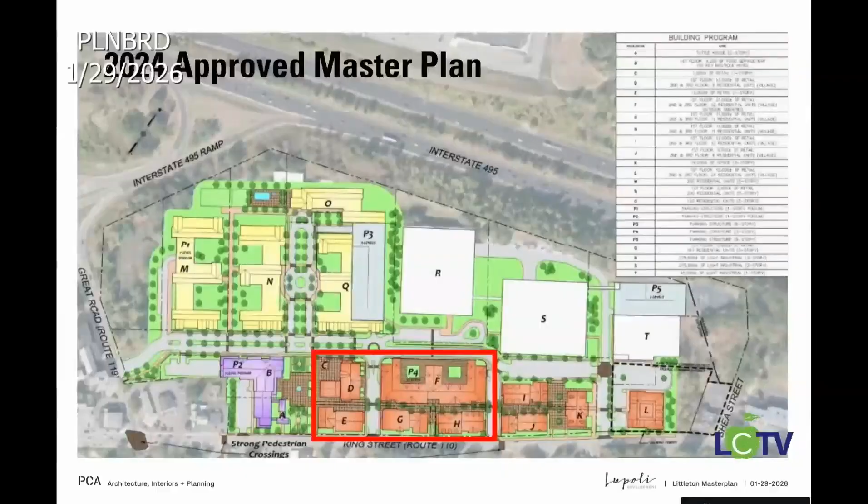Before we jump into the more fun stuff, over the last month or so we've heard from the community that there was a perception that what we were proposing was vastly different from what was approved. I mentioned this last meeting and won't dwell on it too much, but it's important for everyone to see this is what was approved by the board and the community.

This went through a rigorous process for master plan approval, most recently in June of 2024. The outline here shows what this phase is, and the buildings along King Street, so much of it is nearly identical. I just wanted to level set with all the folks that might not be as intimately involved as the board members and our team.

Reiterating that there was a desire by our team, and I think others, to have parking along King Street. Some folks may have heard this last time, but I want to reiterate that MassDOT owns and controls King Street and Great Road. They specifically asked us to remove the parking on King Street as part of the MEPA process approved last year, and we complied. These are just the facts, people should be aware of them. It's not something we did unilaterally.

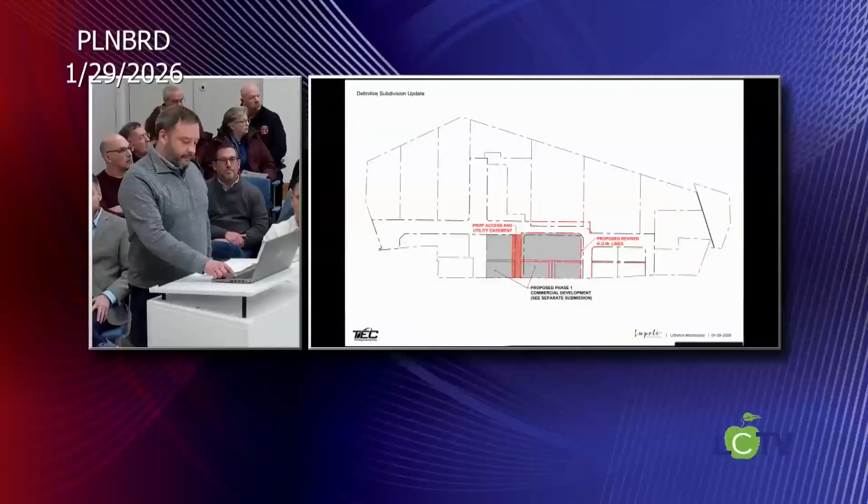Lastly, just to tee up the group before Chris joins and speaks to the traffic and stormwater. Last time I spoke, the message was that we were searching for a balance between the viability of the retail -- and we're going to hear from our retail expert tonight, Jeremy Grossman -- and the feedback we've heard from this board and the community about form-based code and activating King Street. I'm happy to say that I believe tonight we'll show you that we've found that balance.

My hope and the takeaway from the community and the board tonight is that the message now is that we've listened, and we hope that comes through in our presentation.

With that, I'll give it to Chris Raymond. Thank you, Morgan. Thank you, Mr. Chair and members of the board, for having me here this evening. Great to see you all again. My name is Chris Raymond from TEC.

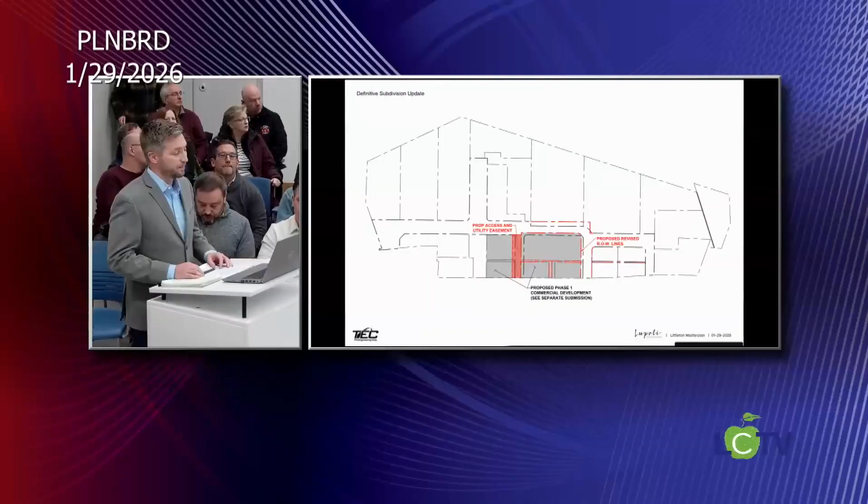Before we jump into the exciting site plan review updates we have for you tonight, I wanted to reiterate this plan. In addition to site plan approval, we're also seeking approval for minor modifications to the subdivision plans to help facilitate the phase 1 development and surrounding infrastructure. As shown on the graphic, highlighted in gray is the extent of the phase 1 development being proposed. The existing property lines are shown in black, and highlighted in red are the proposed modifications.

Could you please speak up? We can't hear you very well. Sorry.

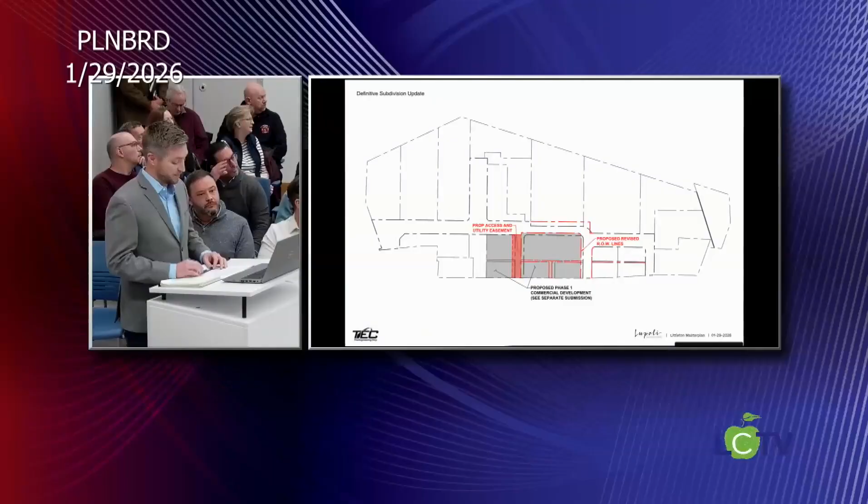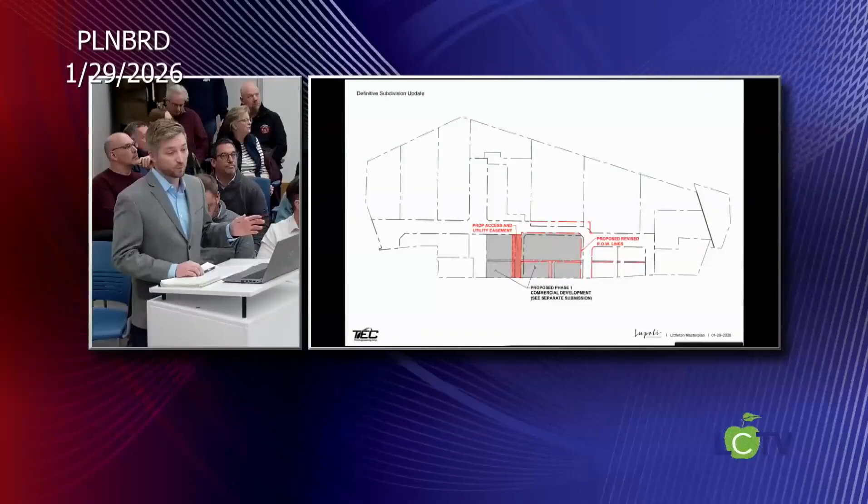Highlighted here in gray is the extent of the phase 1 commercial development we're proposing. Shown in black are the existing property lines, and highlighted in red are what we're seeking to amend with some minor modifications. This is simply a process we need to go through to move these property lines, specifically going through this definitive subdivision process so we can modify the right-of-way lines.

I know we moved the podium, but the microphone's up in the ceiling over there. Can we move the podium that way? I'm not sure how you want to handle that. I think the community still needs to hear -- it's very small, do it. That's great, thank you. Sorry, Chris. It's okay.

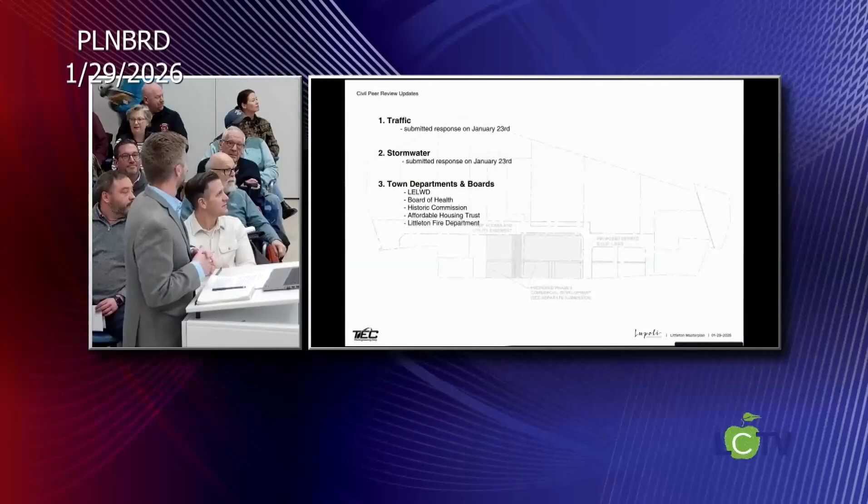All right, so that's the definitive subdivision update. I want to change the lighting so people can see better.

Flipping back on the right-of-ways for just a second -- the timing on the right-of-way changes, is that a separate process, or do they need to be done at the same time as any building sizes being finalized? Yeah, it's a separate process. Nothing in this process changes anything we're proposing as part of the development. It's simply the mechanism to adjust the property lines.

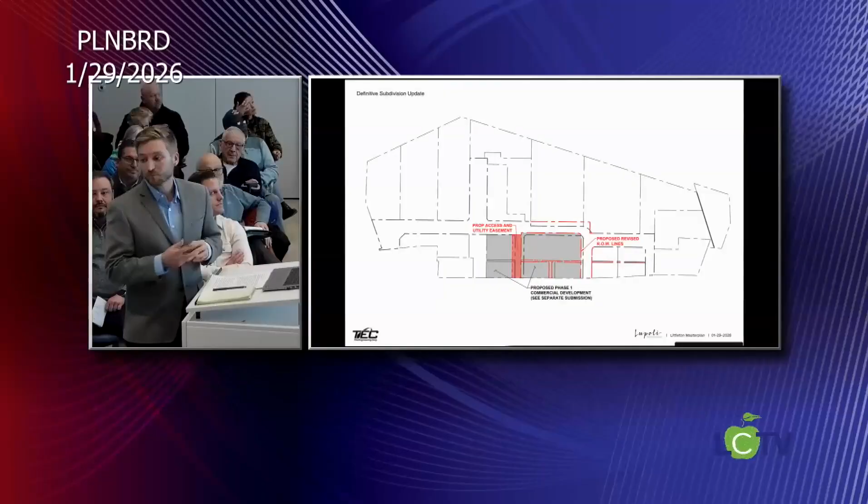But what's not overlaid there is -- if you adjust the size of the buildings, will they encroach on any of those right-of-ways? That's what you can't tell from this, where we're at in the process. Our current proposal doesn't encroach. We're going to try to color in the lines that we're currently proposing.

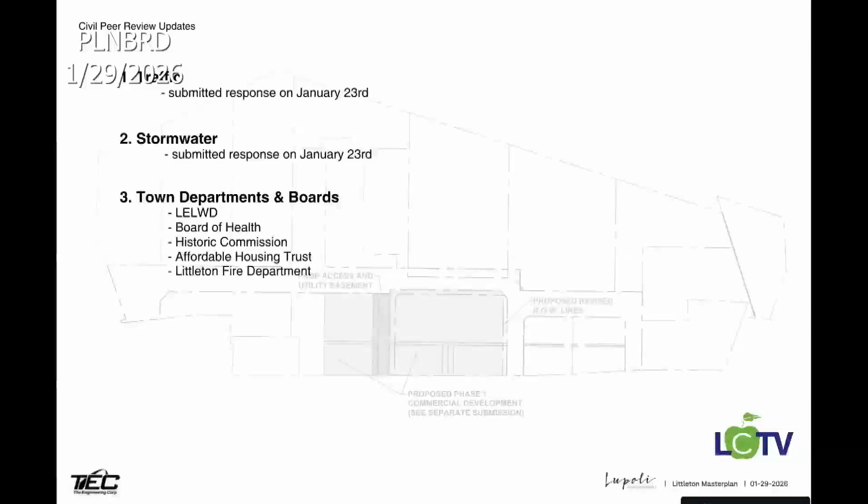I want to give an update on various peer reviews since the last meeting. We were able to get peer reviews from Green International, who peer reviewed both the traffic and stormwater for the site. We've had the opportunity to meet with a couple members of Green, who are here with us tonight, which we appreciate. We've met with them, reviewed their comments, resolved them, and issued a formal response as of last week. I'm sure they're reviewing that now.

In addition to the peer review comments from Green, we've also received great feedback from various town departments and boards, including LELWD, the Board of Health, the Historic Commission, Affordable Housing Trust, and Littleton Fire Department. We have a meeting set up with LELWD and Littleton Fire Department for next week to review their comments.

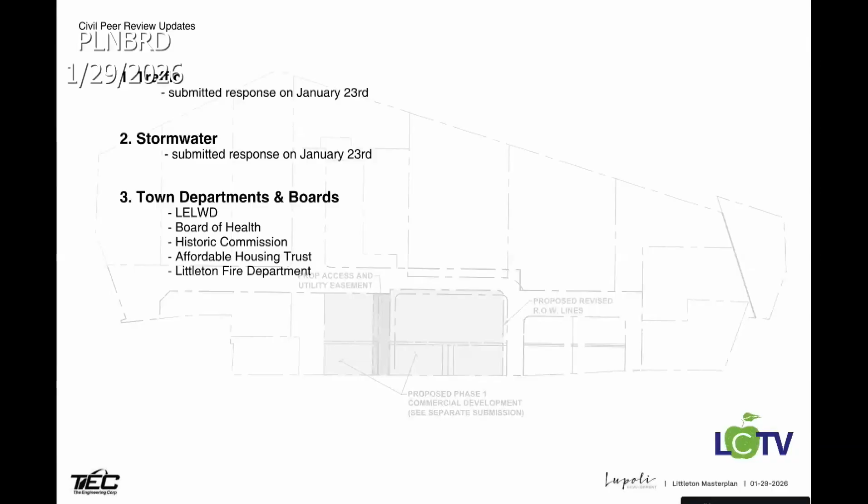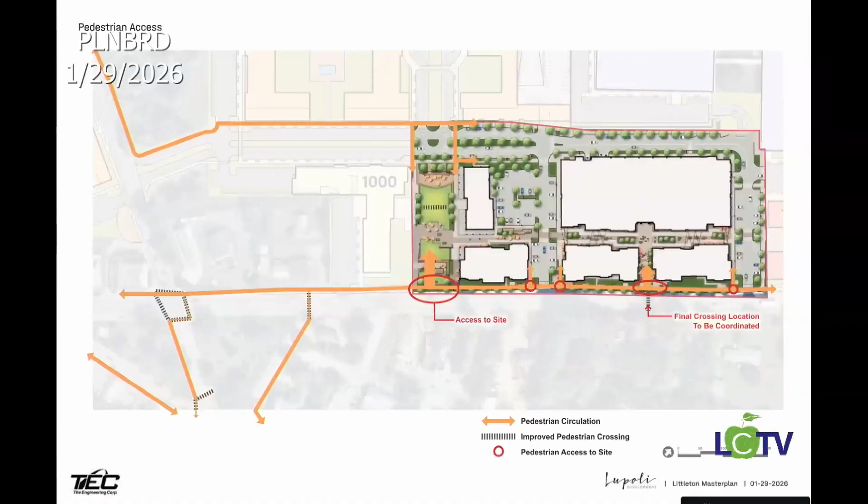We just want to zoom in on this a little bit. Again, you can't really see the aerial, but we wanted to highlight some of the access points, shown by the red circles here. We know it's important to have access from King Street, so you can see multiple pedestrian access points along King Street to bring people into the site. This is really highlighted by the conceptual plan for the town green on the left side here. We know that will be an important pedestrian access to funnel people into the site, especially from downtown and the town green. We want this to be a gateway into the site for people coming and going, to really connect the downtown and the proposed development here.

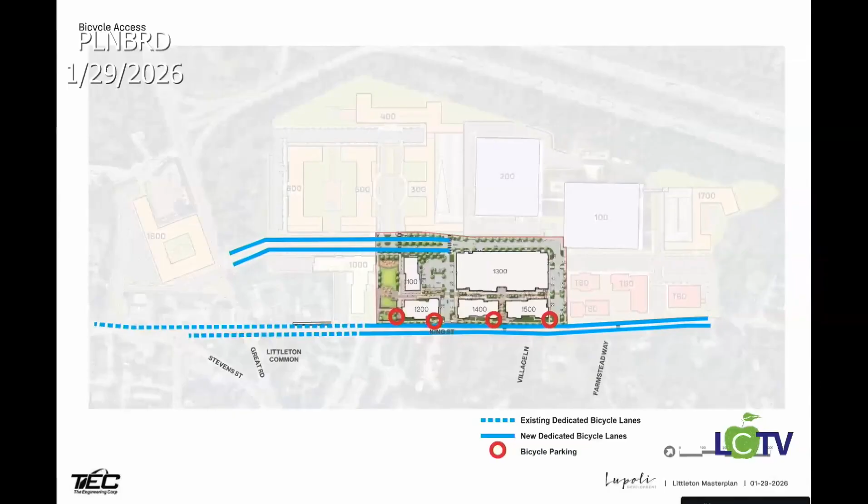And then at the King Street and Great Road intersection, there'll be pedestrian improvements there, as well as traffic signal retrofit upgrades, and there'll be some timing coordination done with the various lights along Great Road to make sure timings are optimized there as well.

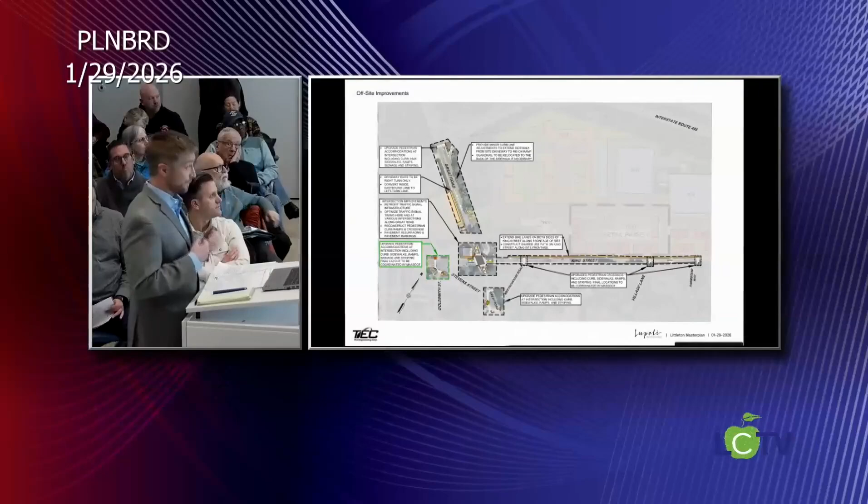And it was really highly focused on the intersection at Goldsmith, Stevens, and King Street, which had the unfortunate fatality. We saw just how important it is to make some upgrades there to make people feel safe when they're traveling in their downtown. It's important for us to make sure that pedestrians coming to and from our site also feel safe. So we are committed to working with DOT to make the necessary improvements at this location to make everyone feel safe.

So just on that new chunk of sidewalk that's gonna go down Great Road there, is that gonna be right at the curb, or is there gonna be a 24, 36-inch berm space between the highway and the sidewalk? Because some of the sidewalks are right against the road, and they're very uncomfortable because that's going to be a speed-up zone for people going onto the highway.

Conceptually, there's going to be a sidewalk there. We have not done the design plans for that, but we will be adjusting the curb line and increasing the sidewalk there. I know there's a guardrail there, so we'll have to work with Mass DOT on where they want it. I just think it's something to take into consideration, whether you can provide that buffer space, or berm space, whatever the formal term is.

So can we pause on this slide and subject for a minute to allow the board to make comments? Carol, you have a comment. Anna, do you have any comments on this scope of work?

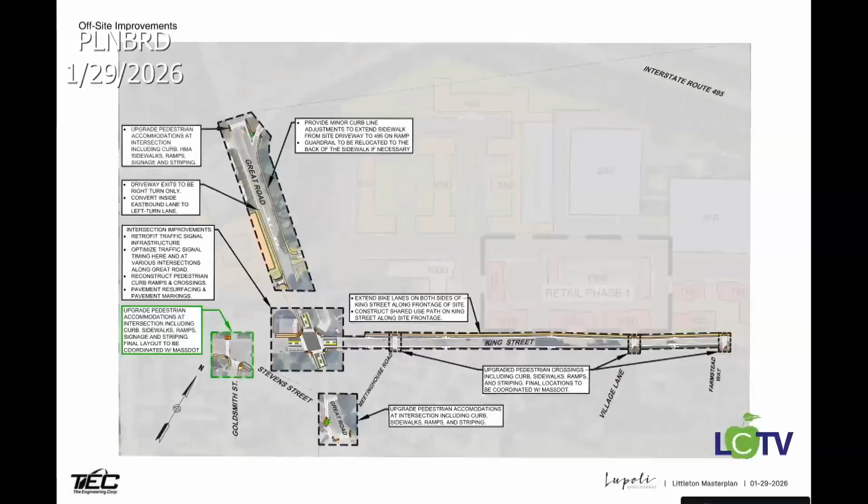Truthfully, that wasn't our first spot to present that. We would prefer a mid-block crossing, but when you do look at the safety concerns we have with incorporating that at our Great Road driveway, it becomes a safety concern, and Mass DOT pointed us towards incorporating this crossing here.

So is there going to be a crossing right there at King Street and Great Road? Right at the intersection? Yep, there'll be all new upgrades there.

So I think I would recommend signage that actually directs pedestrians to go to that corner as opposed to trying to cross a highway. Oh, for sure, yeah, that's a great idea.

Bartlett? Mark? I'm good. My comments would be a couple, a few things we want to accomplish with this aspect of the project.

One of them would be to include a town presence along with you and Mass DOT. You have interests, Mass DOT has interests, the town has interests, and this will be part of the decision. We'd like to set up not a member, but a town presence on this process that would consist of the administrator, a selectman, and a planning board designee.

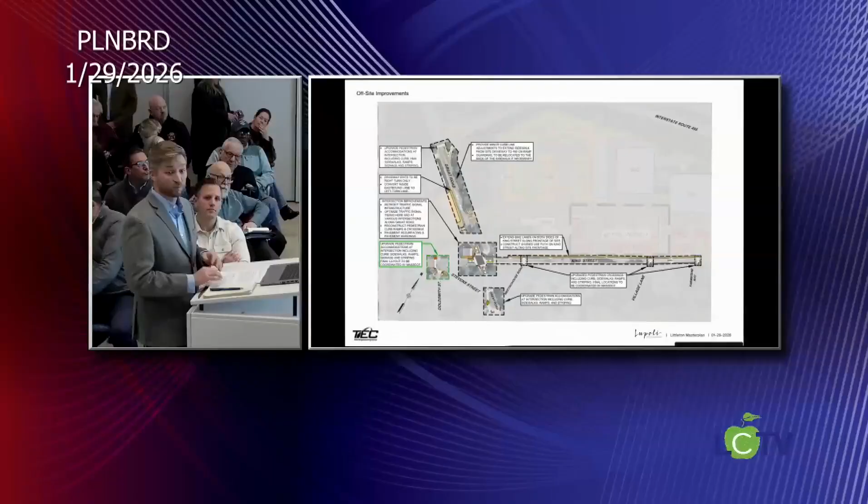I do know at the BPAC meeting, that advisory committee is working towards maybe producing a letter of sorts to send to DOT, some sort of communication with their thoughts and ideas, and that is absolutely something we encourage. If you guys want to directly send some of your comments and ideas to them, we're happy to be involved.

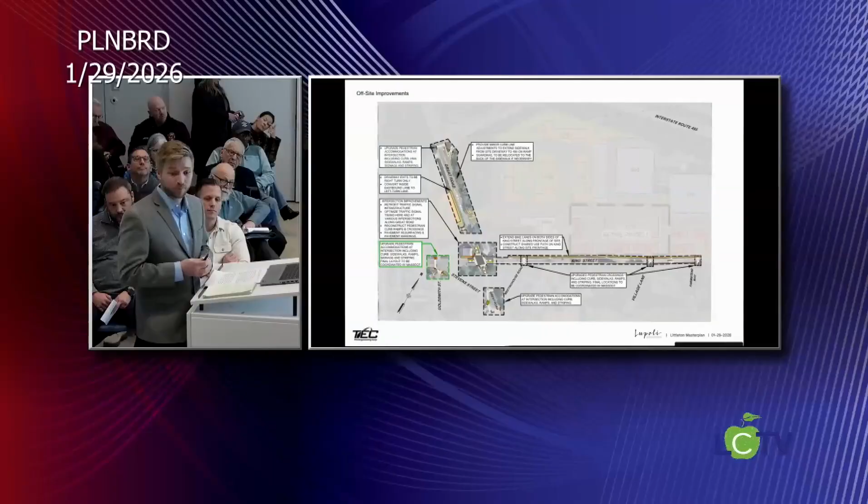Well, I'm speaking for myself. We can talk among the board when we get to that point, but we would be very interested. Jim Dugan, the town administrator, has been in this loop and has some idea about what it would take to accomplish that, essentially override DOT, and it's a town commitment to basically take control of those sections of the roadway, and would also include Great Road.

However, we have an interest as we go forward for this entire area to have a little more control over it. We would have more control over speed limits, we'd have more control over street parking, which would impact further development on Great Road. So anyway, I think we'd like to make that a priority in this process of the traffic mitigation.

Ready to hand it off? I guess what I'd suggest, since we don't control that process, is that we probably would write a letter to the Board of Selectmen requesting them to pursue that. But we can't hold them to an uncommitted timeline.

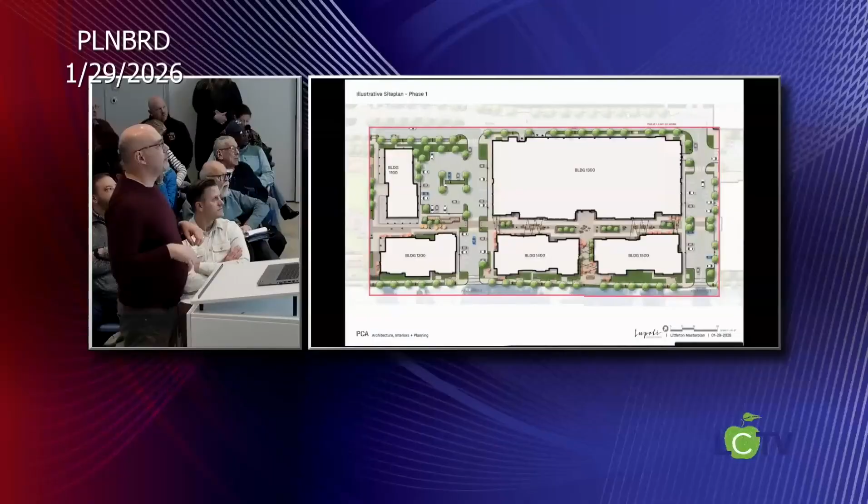So first we're going to start off with an overall reiteration, becoming familiar again with the main parts of the pedestrian realm of the project. So we have our main spine working through the center there as one area, and then we have our green, which would be just off to the left of the screen there. We have, of course, King Street, the King Street edge, and then between building 1400 and 1500, we have our little Vest Pocket Park.

So tonight we're going to focus on King Street and the changes we made. If you look up at the top image and quickly look down, look up, look down, focus on King Street, hopefully what'll start to bleed through is what we've been working on, based on the comments we've heard from the board and, of course, the community.

So if we look at the lower image, or actually, let's stay on the upper image first. What we had presented before essentially was at the back of the roadway curb, we had our treeway, and then on the inside of the treeway, we had our 5-foot sidewalk, and then we had either stone walls to help make up grade, or planting and those sorts of things.

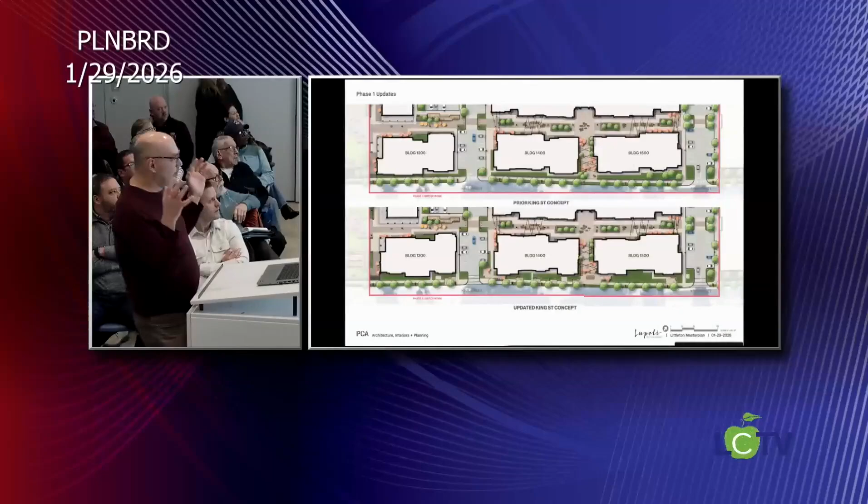So now if we look at the bottom plan, starting over on the left-hand side, just to the left of 1200 is where our green is going to be. So that's the first kind of moment along King Street. We do have some images that quickly show some high-level ideas to tie this all together. And then as you walk east on King Street—

Coming down towards the corner of 1200 is where we hit our first little node. And what we're trying to do essentially along the length of King Street is not focus on one point. We're trying to create moments where we can through the length.

Some of them are bigger, like the green, and some are smaller, like little micro nodes of benches, and others are intermediate, where we were able to wrap the building and introduce entrances, at the left lower corner of 1400 and the left lower corner of 1500, where we have nice little cafe zones.

And then, of course, we have our little Vest Pocket Park between 1400 and 1500, which is a nice bookend for what the green is going to be offering along King Street.

So again, if we walk down, we get to that corner of 1200, and you can see that's our first little node that we're creating. And that parking space—we took 2 parking spaces off out of the parking count there, which was a tough pill to swallow, but we thought it was worthwhile to create a little node along King Street. We do have some imagery that'll help clarify what that'll start to look like.

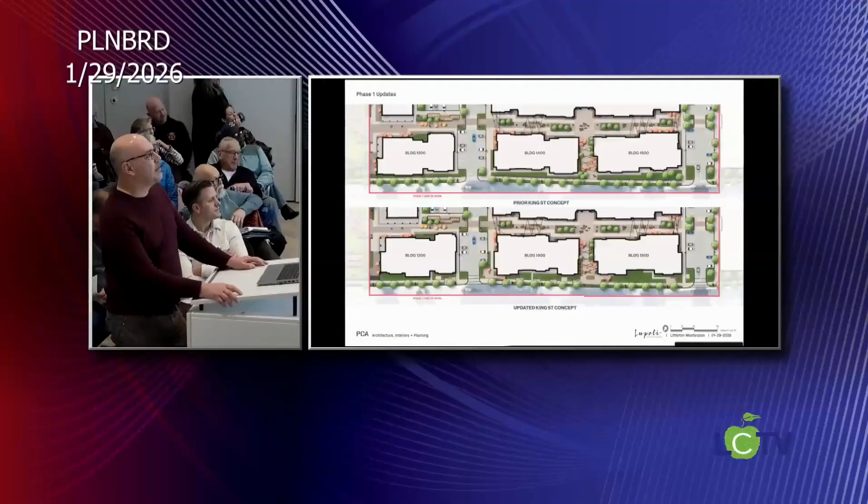And then just to the east of that, we have another little entrance that we were able to get in there. It's at 1400, and we introduced another little cafe zone there. And then moving down towards the right side of 1500 along King Street, we have another little nook with some more seating. Again, what we've tried to do was spread it out where it made sense, where we could in terms of grading.

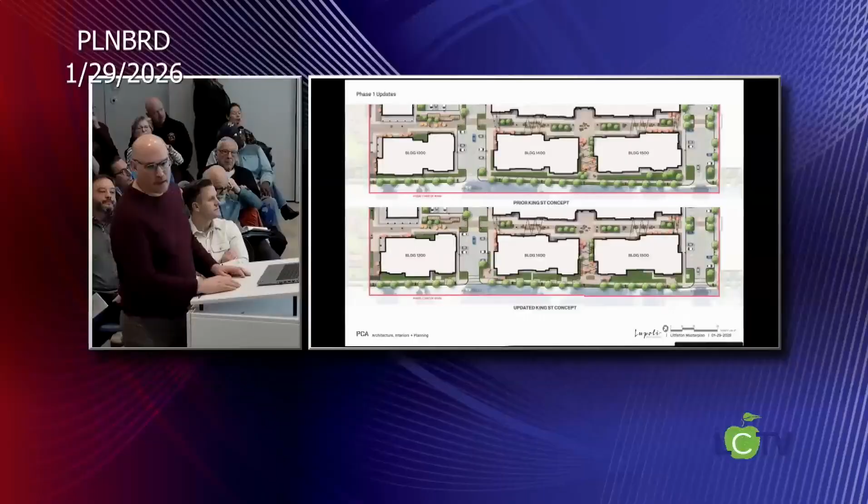So that way there, if you were getting a coffee, you didn't really have to go too far to find a place to sit, depending on what scale and what type of intimacy you wanted to hang out in. And so from here, we'll relate it a little bit to the form-based code that was developed.

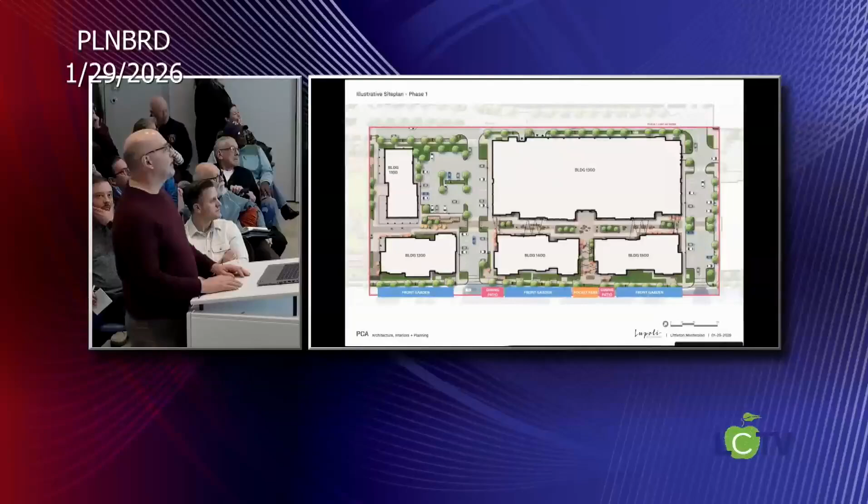We've got the front garden and the dining patio, and then, of course, our little pocket park, which was not in the form-based code, but I think it's worth mentioning because it's a little different space. It is a nice public programmable space that's going to be along that back of sidewalk of King Street.

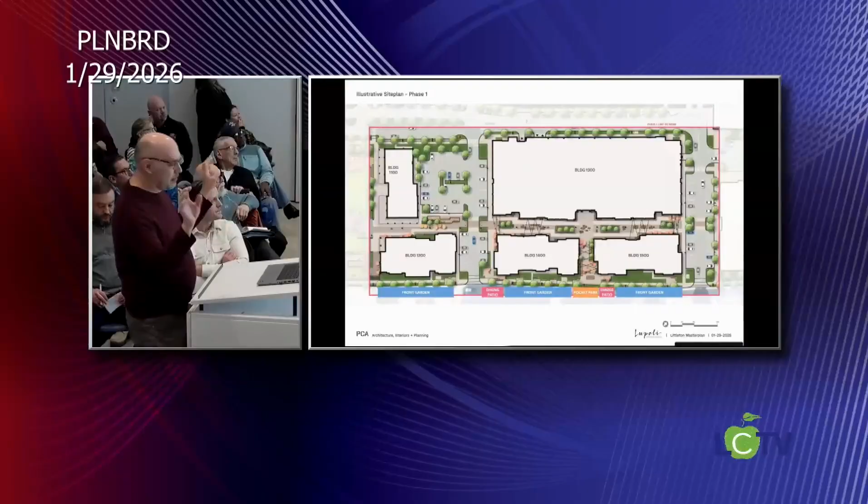And you can see it's sort of stretched along through the whole length there. And then we're going to go through a couple of images, kind of relating it back to the form-based code. And then after this, we'll have a quick walkthrough down King Street so we get a sense of what it's going to look like.

So here we're looking at the front garden and requirements there: 80% planted area, minimum 4-foot wide walkway. We have our nice little garden planting, could be perennials, little woody plants, annuals, and then a hint of what that mini little seat nook will start to look like, and our initial ideas of the type of seating we want out there. Those seats aren't going to be short. We envision them being 2 benches put together, could be up to 14 feet of length of sitting area.

And then we're looking at the dining patio. This one in particular is at the corner of 1500. And again, I think the code called for a minimum of 6-foot width for movable tables and chairs. We're achieving that here, plus a minimum of a 4-foot walk to get in that door and get by there.

These will be movable, so you'll be able to make your own space depending on how many people are in your group, or if you want to just sit on your own and scroll through Instagram, you're able to do that here.

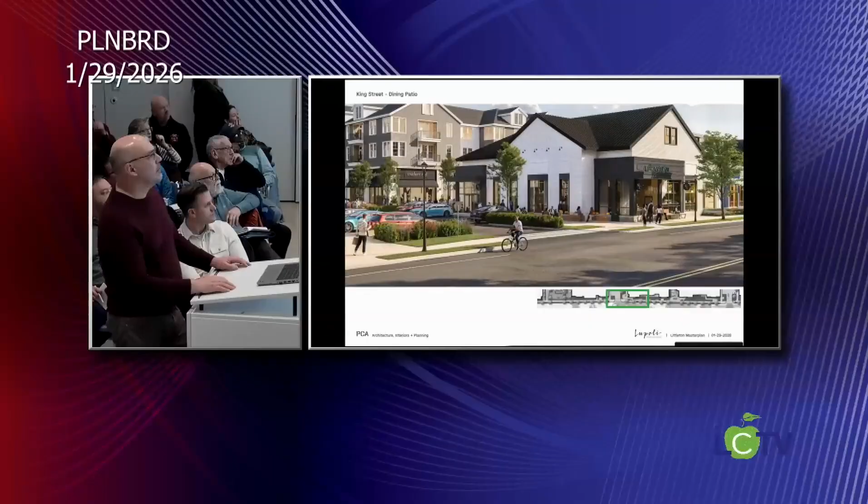Continuing on down, this is showing pretty much that stretch in front of 1400 and our little mini seat nodes that we have in there, and what those will start to look like. They'll have some weight against the base of the building, so everything feels integrated and feels like a complete streetscape along that edge.

And then finally, coming down here to our little pocket park and cafe zone at the corner of 1500, you can start to peek into that pocket park and what that back side is going to look like, and how those fixed benches can really start to animate that edge and help make an inviting entrance into the project here.

I think that's it for me for the public realm. Move off to Jim. Jeremy.

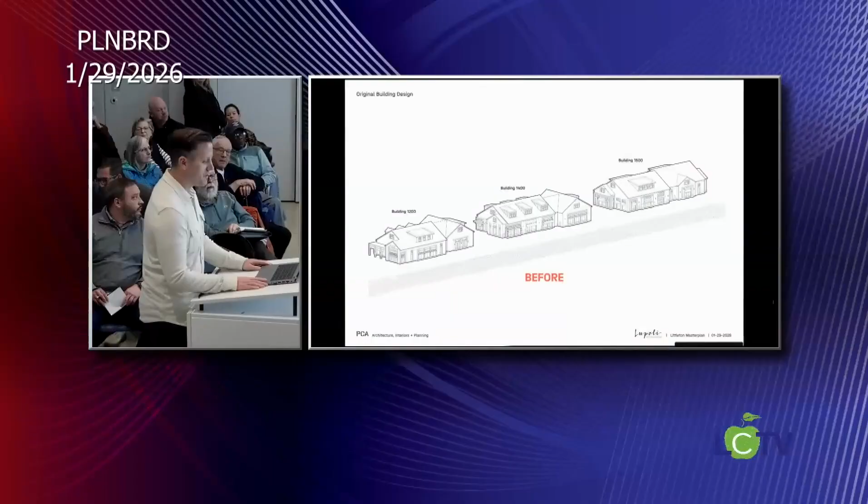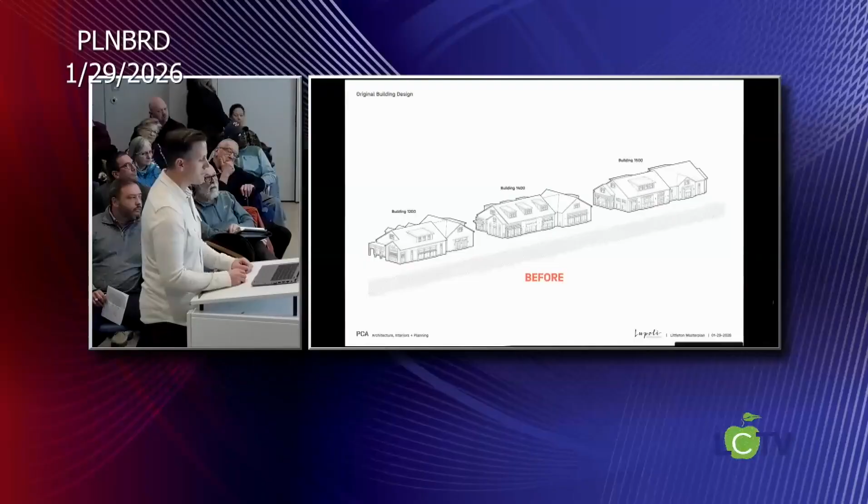We're almost done. Dave Snell from PCA, Master Plan Architects here. I'm going to continue this and talk about a lot of the changes we made on the buildings along King Street. We've heard a lot from the community, we've had a chance to meet with UTL, we've talked through the peer review with Jesse and gone through a lot of different thinking. I hope it comes across—we've worked really hard to manipulate these buildings where they hit King Street to accomplish many of the goals set out in the form-based code.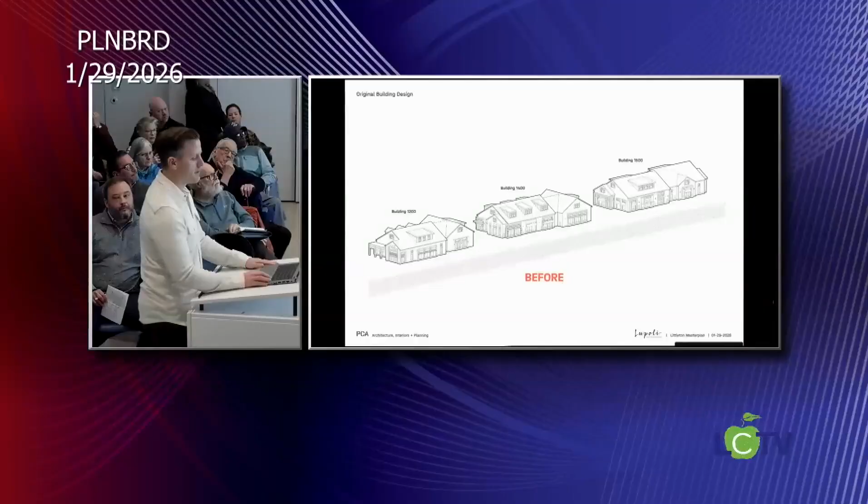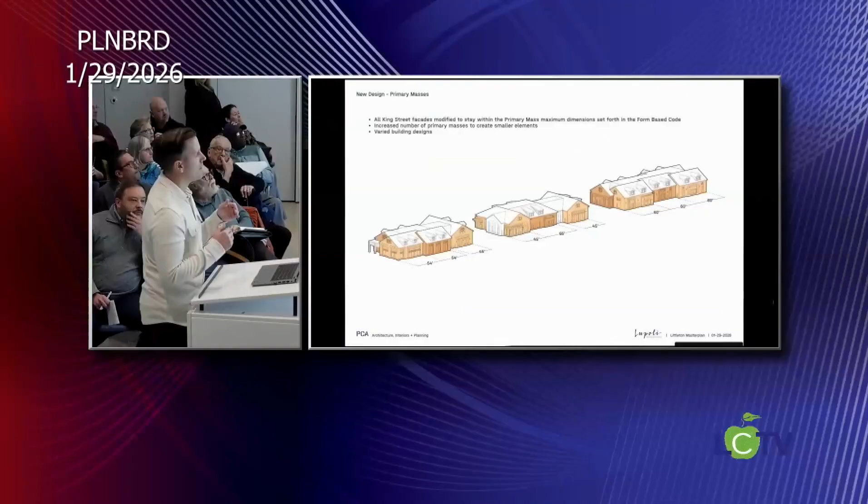So this is the before and this is the after. I'm going to flip back and forth because what's important is to try and sense the scale—the building volumes are quite significantly smaller now. That's accomplished through adherence to some of the primary mass dimensions in the form-based code. What you see here is a diagram of this proposed change: all the facades facing King Street are held within the limits of the form-based code's dimensions, so the roof lines have come down and the volume reduces.

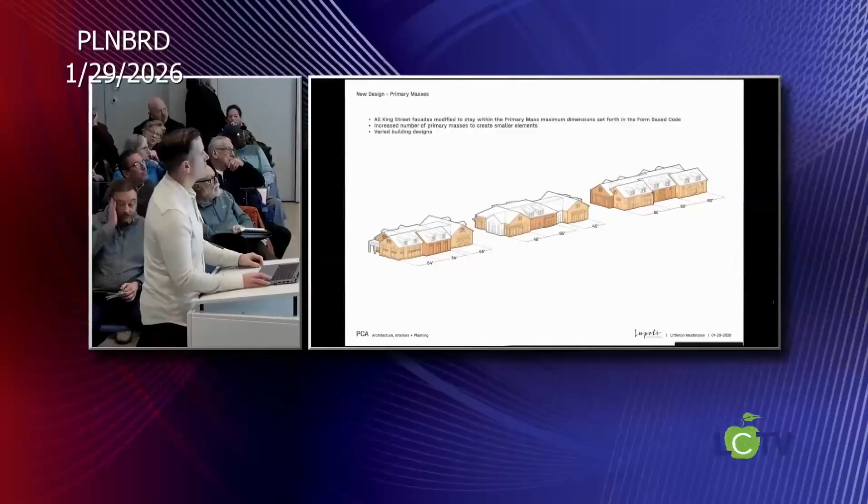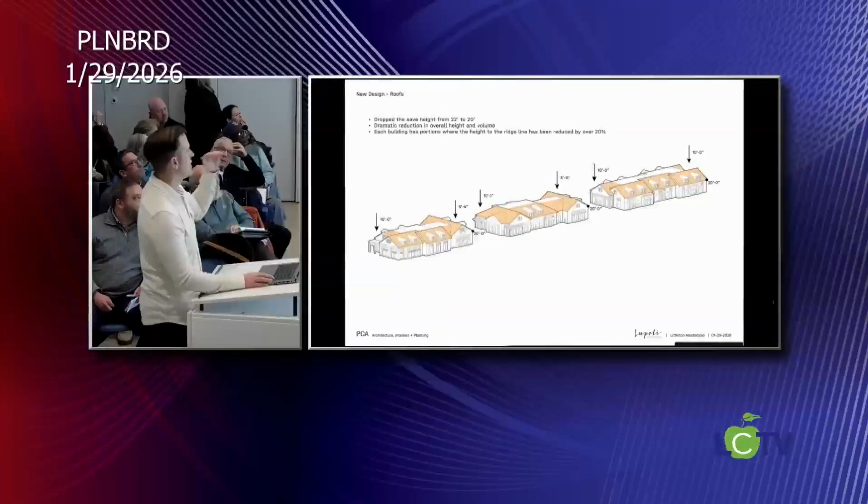Also, in our back and forth with UTL, the idea of bringing in more of the primary masses helps vary the buildings, so they are not all the same building—each one is unique and different. What we think we've accomplished is really brought the scale and volume down, increased the variety, and addressed much of what we heard about scale and presence. This diagram points out that at some points on each of these buildings, the ridge height—the top of the roof—is dropped by 10 feet, which is substantial.

Also, Chairman Yates, I know we talked about the eave height. We've dropped that from 22 down to 20, as we've done this proportional study to maintain how the buildings feel and making sure the roof lines don't feel too heavy. So that ridge line reduction really helps quite a lot.

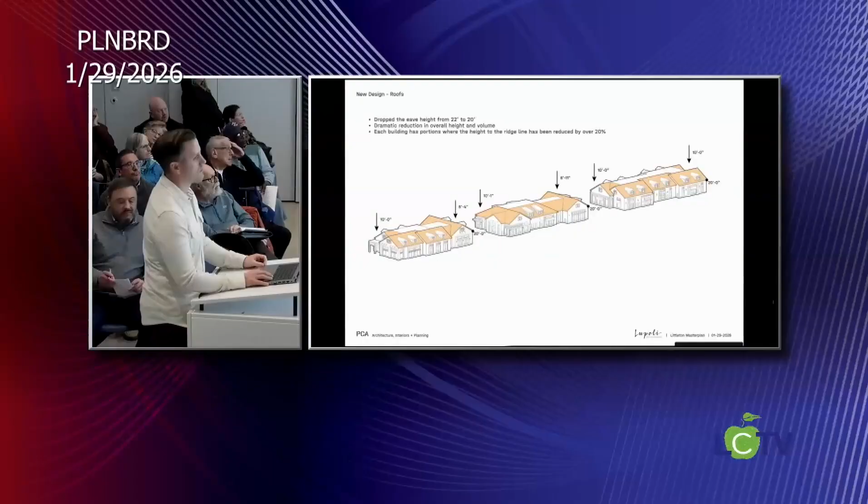And we've increased the fenestration percentage along King Street in every building. We've added entries as discussed. Every building has an entry. The one on the corner of 1200 is close to King Street, but we're dealing with some very severe grades there, so just want to acknowledge that, but we have put that there. And all the windows will have clear glass, not frosted.

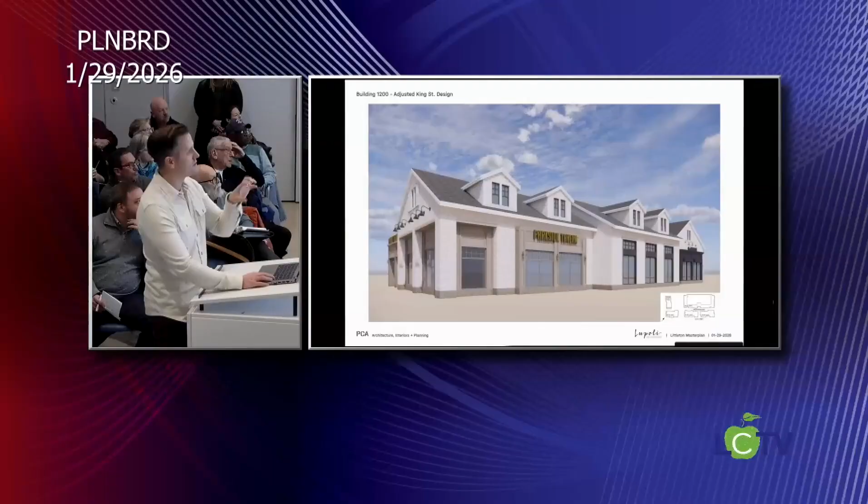And then we'll show you what those windows are expected to look like too. So this is just a before and after to show each building quickly. So this is the before and the after. And I think, going back and forth, you really get a sense that the scale is quite a bit smaller. These smaller component parts, more in keeping with Littleton, the Common, and the neighborhood here.

So this is 1200. These different changes here, smaller dormer elements, smaller individual component parts. Also stone bases throughout here, which is another thing that came out of the conversations with UTL. Each building has a different body material, so they're all light tone, but this one is brick, this one is clapboard, the last one is shingle.

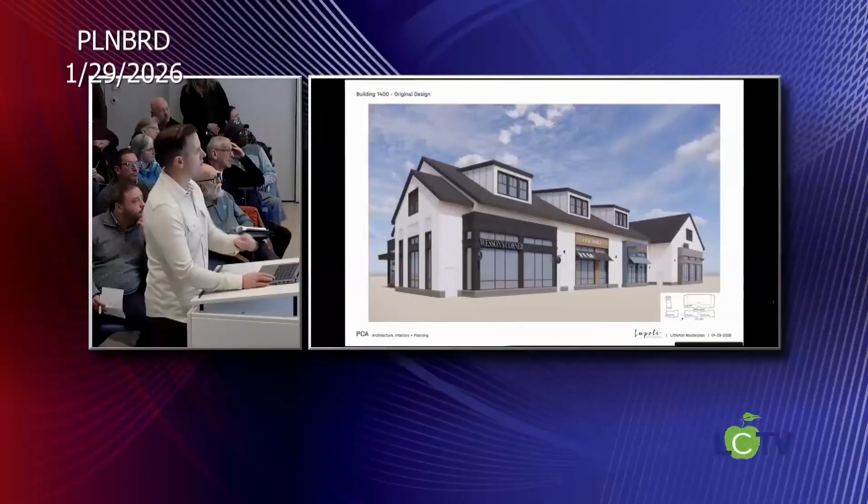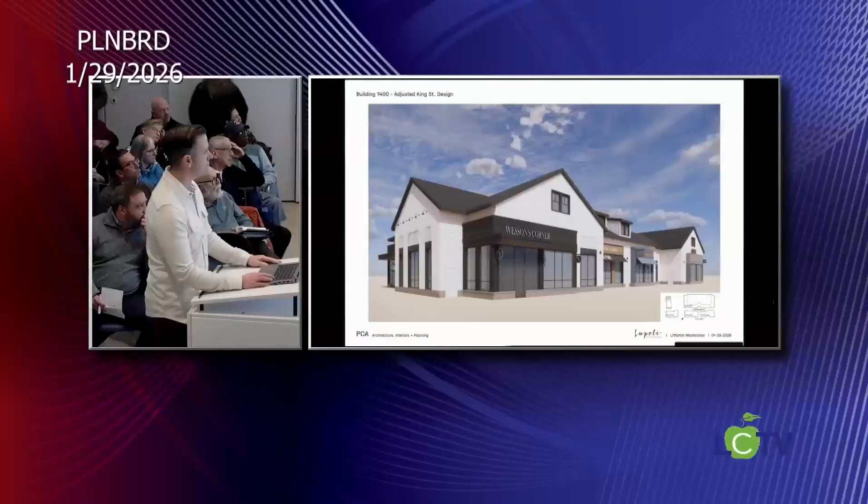So this is the before and after on this one. Quite a bit of manipulation here on this building, 1400 here. This is one of those entry corners. This is the other side.

And then 1500 before and after. This one has quite a bit of change. And this is the other side. Let's go back and forth.

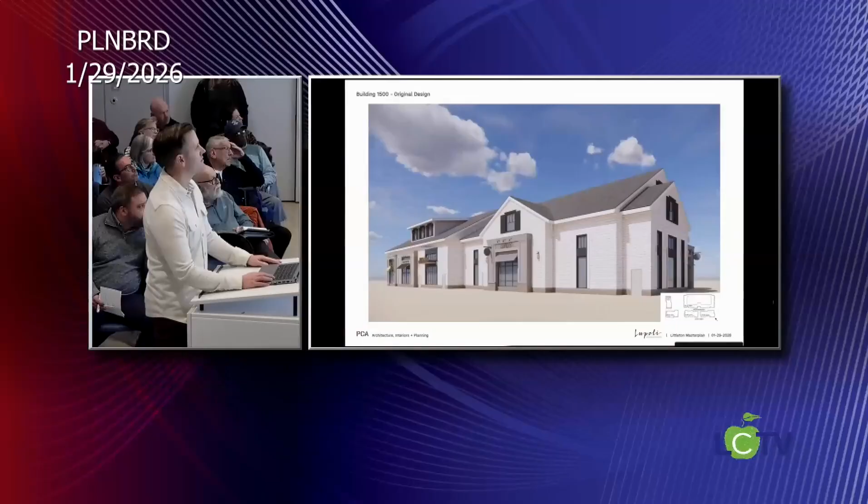Yeah, so Joe sneak peeked a lot of these renderings, but just these, we've zoomed out in all of these so you can get the full picture. His were focused in a little bit more on the closer moments.

But again, just want to reiterate that this is not turning its back on King Street. This is an engaged and active part of King Street. And also this entire project is welcoming the residents of Littleton in at many points. So the site is extremely porous, and at each location where we draw you in, there are moments of activity, there are places that you can go, there are places that you can sit, there's entries at these points. And all the spaces in between, we've worked to bring activation and amenities throughout.

And as we said before, the green is a huge asset. This is a transformative element on King Street. It's going to change the character. It's going to really be a new community hub for everyone in Littleton to enjoy. And while we're not here specifically talking about that, it's hard to ignore the fact that it is an integral part of this. This master plan and what we've all been working towards for many, many years is something dramatic and hugely useful for the town as a whole. And we think it's really powerful.

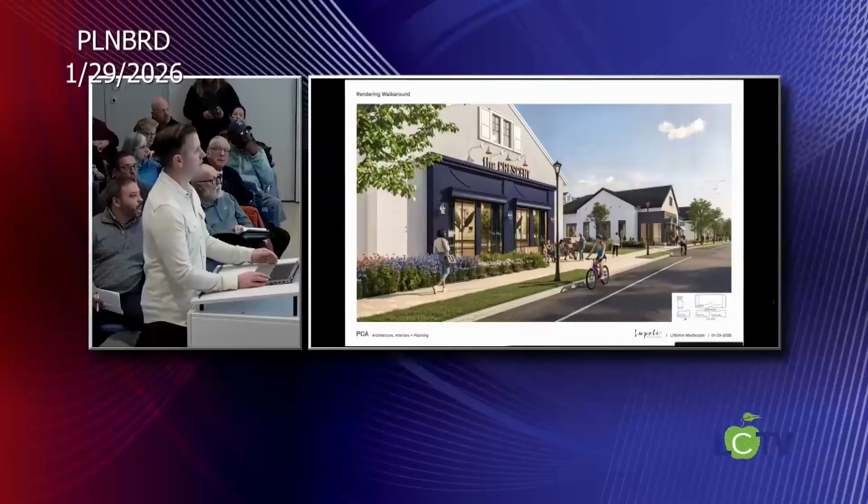And so as we walk down King Street, as we go a little bit further, we see the combinations of these different front gardens and dining patios, entries. And what you see in some of the windows here is that every window now we've integrated additional depth for display and activation through art or any of these components. So there's always something going on with light and activity through the whole street. This is pulled out at the corner of 1400.

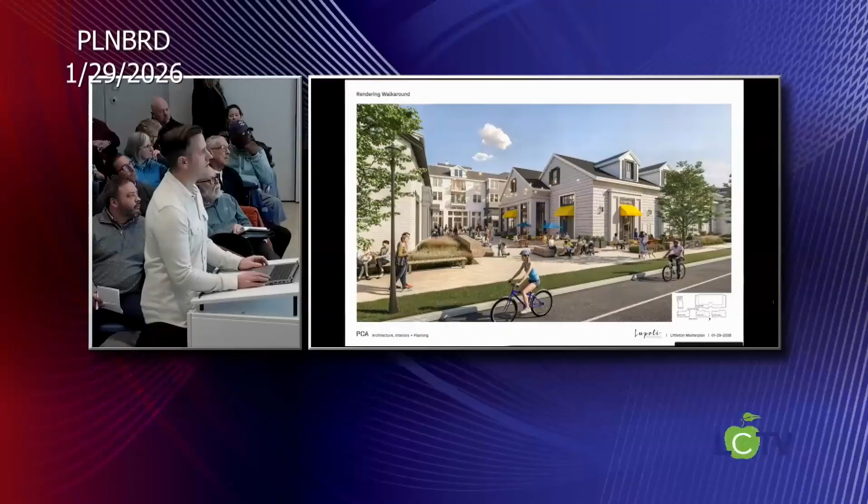It's important to see the scale transition that occurs. All of these buildings have their own individual character and massing, and they transition the scale well at this edge up into the back of the site. We're quite happy with these changes and glad to work through this with all of you. We're really proud of where it's gotten to, and hope you agree this is a significant improvement.

This is looking from across the street back through the Pocket Park. It's important to note that 1300 in the back is heavily obscured—it's really difficult to see. If you're actually on the street, you really can't see it. So we focused a ton of effort on getting King Street right.

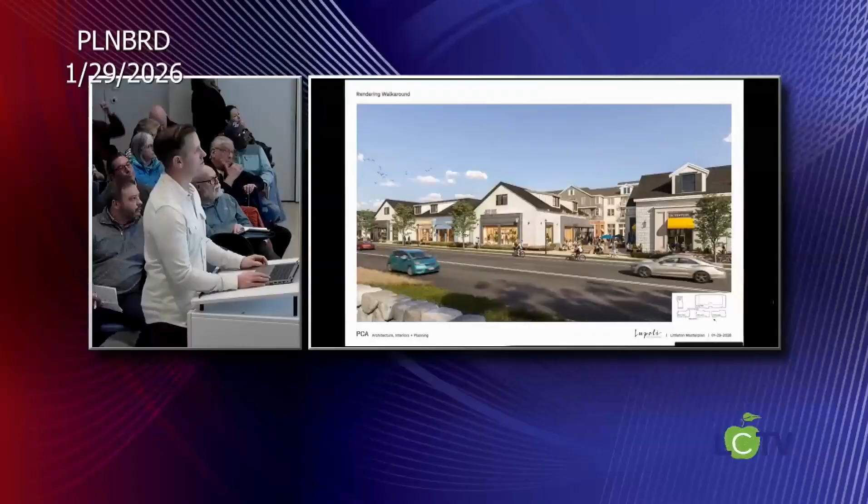This is a view I don't think came up. This is the end of 1500. You see another one of our patio spaces here, and again, a good throat coming into the entry point of the site.

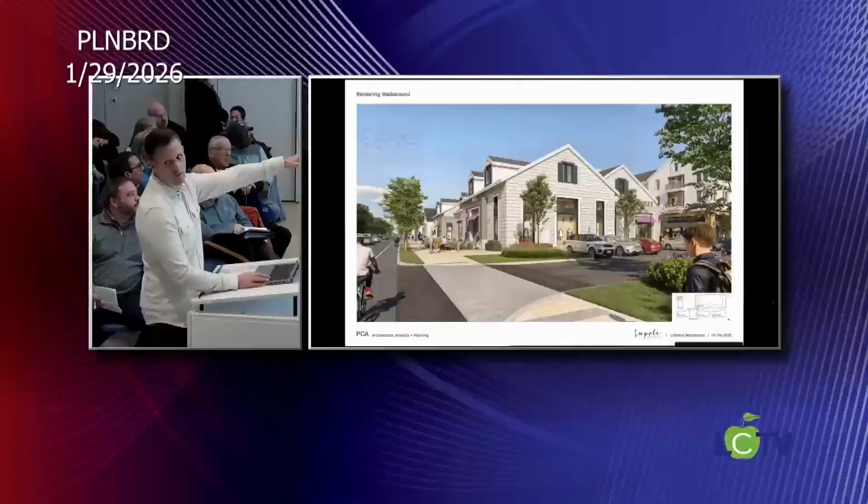Another thing that came up through the peer review was flush sidewalks at all these entry points. So you see we've elevated all of those—that was a design change that occurred. At each one of those entry points, we've elevated the sidewalks as well.

As a reminder, these have been updated with the new buildings for the pedestrian way. We think this project has so much to give Littleton—a killer King Street, an incredible pedestrian way, a town green, and a ton of amazing restaurants and retailers coming here. We think this is going to be a really exciting place.

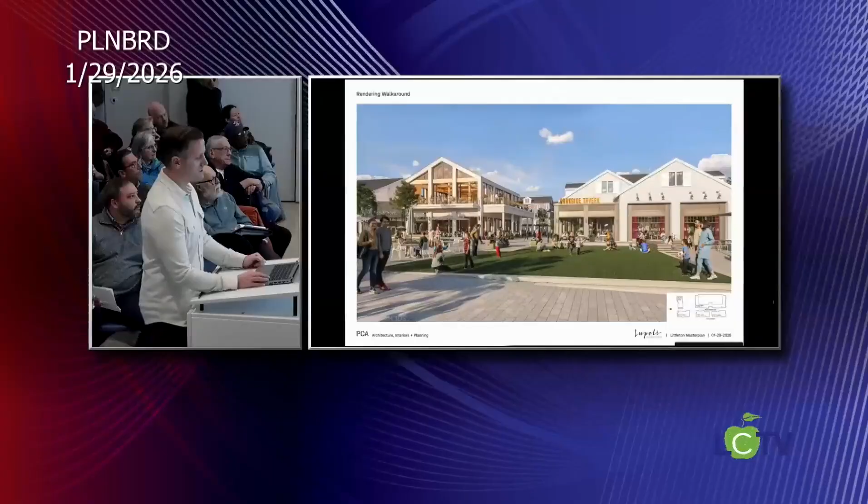So just want to leave you with a couple of these views. And that is it from us. So I'm going to give it to Morgan.

Do you have a question? Yes, could you go to the rendered walkthrough? Rendering—that's fine, yeah.

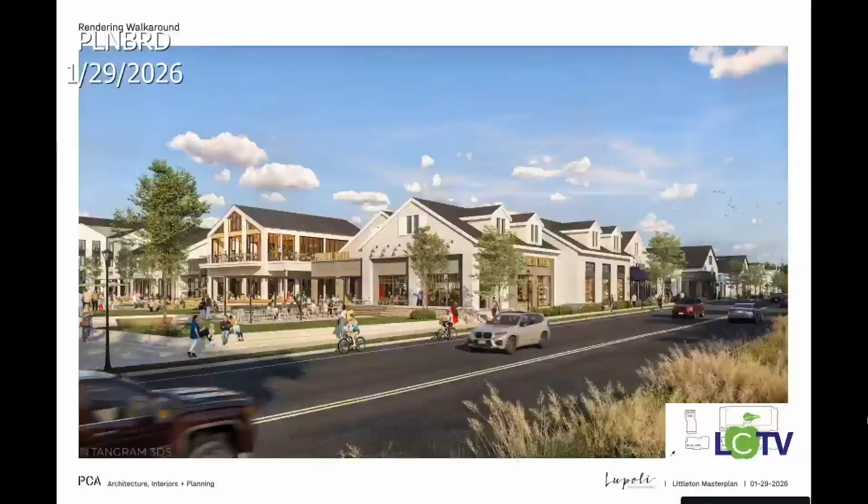I think you're planning restaurants and coffee shops on the corners there where the entries were. Whose space is the seating outside? If it's a restaurant, it wants the seating for them, not for people just walking by, versus a coffee shop outside. What's the ownership concept of the table space outside, and where do the restaurants have patio space? Jeremy, I don't know if you want to speak to that.

That's usually something that gets negotiated. But you're presenting this as all public space right now—that's what I'm trying to understand. Which part is going to be public, like all the benches, versus controlled? I think the question is the cafe tables and dining patios, and I'd say those are likely to be controlled by the restaurants. All of the patio seating tight to each restaurant space will be dedicated to and maintained by the restaurants.

But how does that overlay with the pictures that you showed us? I want to make sure I understand which areas are likely private patio space versus public. This space here with the orange seating is likely to be activated by the adjacent restaurant. You can see on my map if I go to it.

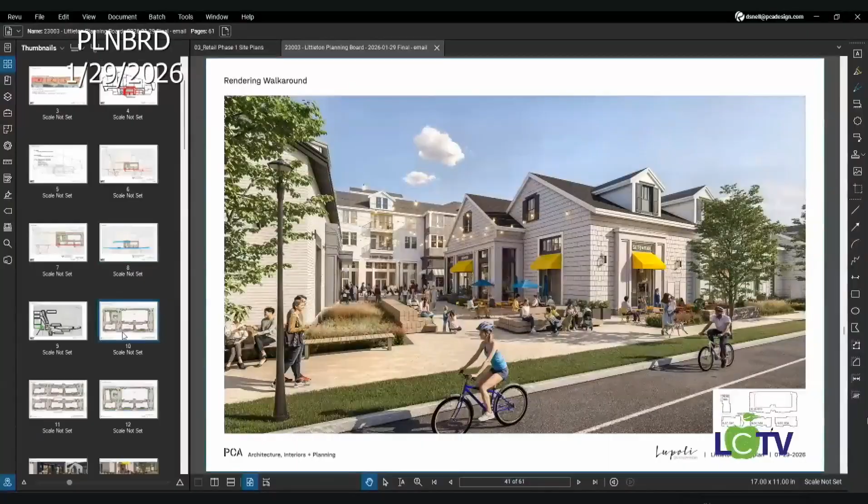I can't get a feel for that by trying to match what you just said. I can show you another diagram to clarify. I'm going to zoom in building per building.

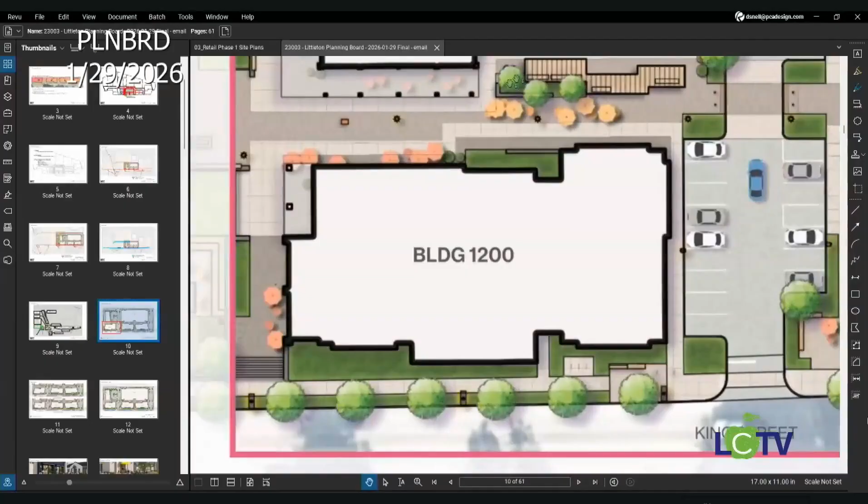This restaurant area, depending on how we lease it—whether it's 1, 2, or 3—there are a couple of opportunities. There's some opportunity to activate up here against the pedestrian way, but there's a ton of space here which we think they'll want to activate against the green. And the yellow—good point—everything up here in yellow would be public. This whole seating area on the corner is public.

This side of it, I think is probably TBD, but these seats would definitely be... they can kind of feel like that, they're really with the door there. And then all of these seats, public, public, public, public, everything here public. This would be likely the restaurant seats, and then maybe there's some here that would be TBD. And then this is all public.

Personally, I'd like to see the renderings and everything updated with distinct, more color-coded sections, to be sensitive to people who may have color blindness, as to which parts we're going to see as public versus parts of the retail settings, so that we don't set a false expectation from our community that you can just grab any table on this plan when you're walking down the street, because I don't think that's necessarily going to be the case.

I can't tell, and I don't know that we can. We could do that, but is there an overall that we could do too? I think if you look at the percentage of pedestrian realm spaces, the spaces that aren't public - I don't like to use the word public - the ones that aren't managed by a tenant, I think you'll see that percentage is pretty small. You're talking about the corner of 1,500, corner of 1,400. And maybe that edge we've created out of 2 parking spaces - that's a tough one, but I think that could go either way. And then that I think is it.

And then we've got the entire green space and that entire spine in the back, which I know is on King Street, but if we just focus on King Street, I think you're going to find - I'm not opposed to what you presented here or anything, I just want clarification so people don't have a wrong expectation if they grab an ice cream from some other place and they're walking down King Street. And I think you're right, they're not landing in some restaurant table space.

The second issue is, the way this is landscaped currently, I don't know if we could do parking along King Street. It's possible when you look at it, maybe you do parking in front of building 1500, or I'm just acknowledging that there's issues here.

But I think as much as you've worked on the King Street buildings, you've worked on the King Street sidewalk with the benches. I like the look of the benches, at least in the renderings. But there still isn't, that zone between the sidewalk and the buildings is still mysterious, and I don't think that, well, yeah, you show plants, but...

We did submit a landscape plan. The landscape plan which was submitted does have more detail on that.

When I say mysterious, I mean it doesn't go quite far enough in supporting the potential for entrances along some of these other spaces, or the potential for an additional restaurant that might have a completely private patio in the front.

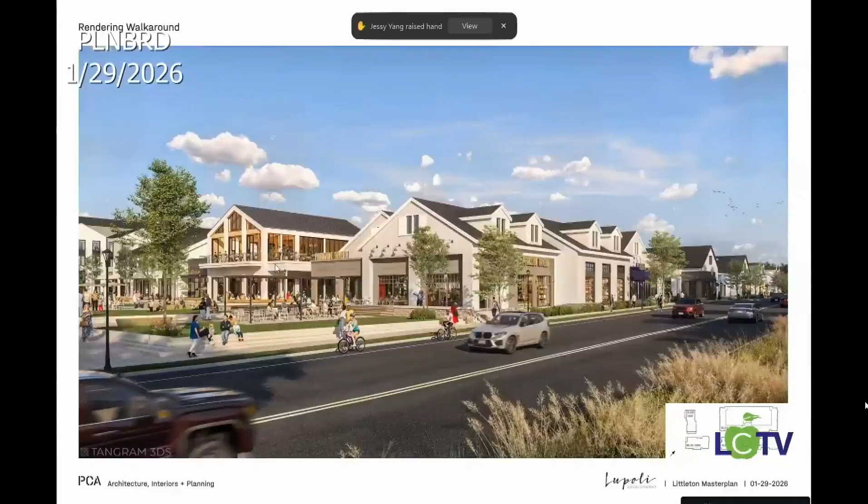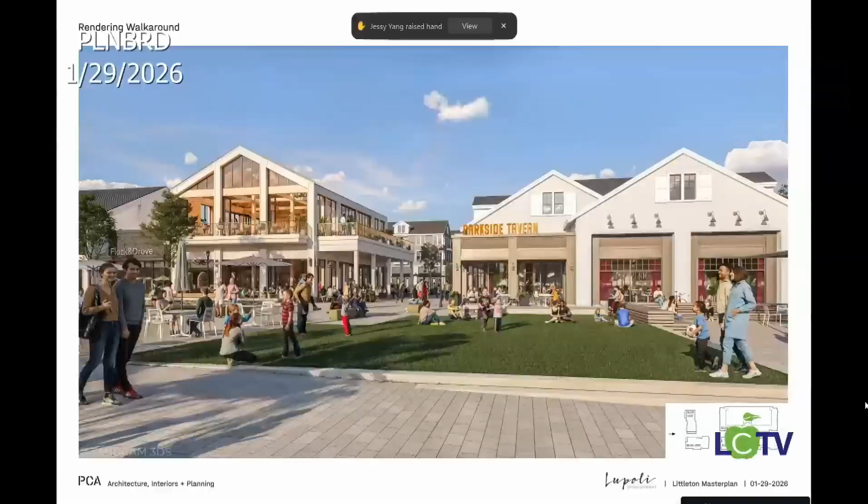Could you, I know that, but you're being invited to continue, you've accomplished a lot. You're being invited to go a little more. We can't design it for you, and we understand the retail imperatives, but whatever, I'm just putting that out there.

Well, let me ask you a question: would you rather sit and have dinner with your wife in that space over there, looking at other space across the way, or would you rather look at traffic? Oh, I'm there, I mean, see, that's my point.

King Street does not offer anything as far as eating, stopping, having an ice cream, having a coffee, yes. But if you're having dinner, you're going to be in that common area with people on one side, people on the other, which is most of the places you go to that are like this, that's what you get. That's what they're trying to accomplish here. That's what the fly-through we saw two years ago showed us. That's what this is.

I go back to, I agree with you totally, but I go back to the fact that there's going to be 800 new families living on this parcel, and each one of them is going to have a way of using this site that we can't anticipate, maybe it's even if you just walk your dog.

That's fine, but not sit there with dedicated space for a restaurant, okay. That's going to be in between or off to the sides. Coffee, yes, sit there, read the paper, have an ice cream, yes, but as far as dedicated space...

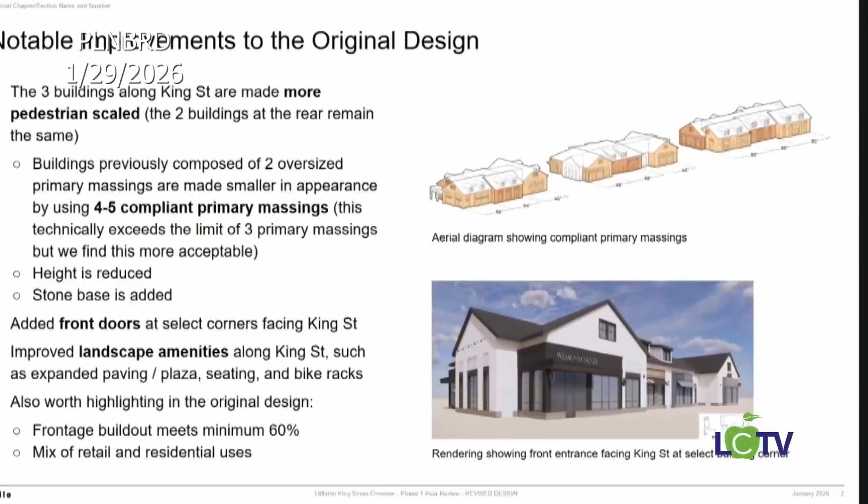I'll share my screen. It's late, I know it's late, I'll be very quick. A lot has already come up, so I'm not gonna belabor any of this. I'll try to just speed through this very quickly. This is about 9 slides, and I'll try to fly through this quickly. I do want to acknowledge the design team has put in a lot of effort. As a designer myself, seeing all the work since the 8th or so, it's a lot of work.

They worked to make the 3 buildings smaller in scale. They've increased the number of primary massings. It technically exceeds the limit of 3, but we think it's acceptable. Heights reduced. There's some architectural features added that are more in line with the rural character of Littleton. There are a couple of front doors added at the corners, and there's a lot of thought placed on the landscape improvements, etc.

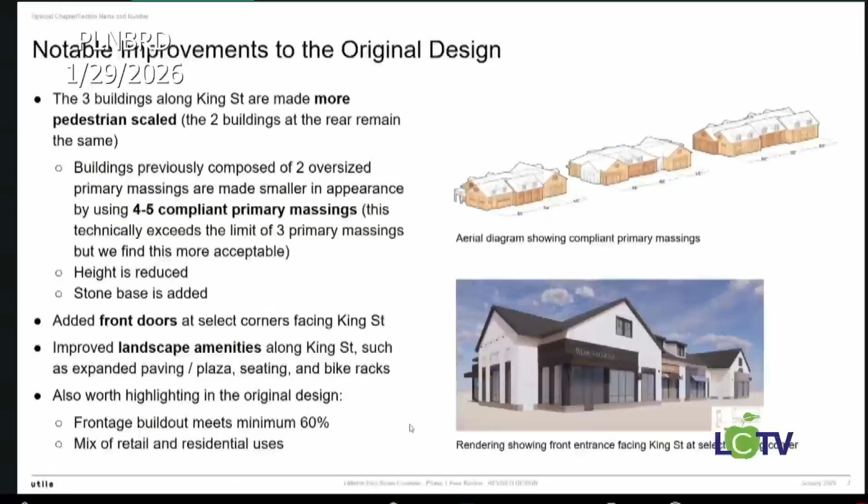And I do want to mention, I didn't get the chance to say it last time, the ways that the project is compliant. Such as, for example, notably that the frontage build out along King Street meets the minimum 60%. There are setback buildings along King Street there, and there's a mix of retail and residential uses that could be really rich. So I do want to credit the team for that. I'll just cut to the chase - what are the remaining concerns? I've already alluded to one.

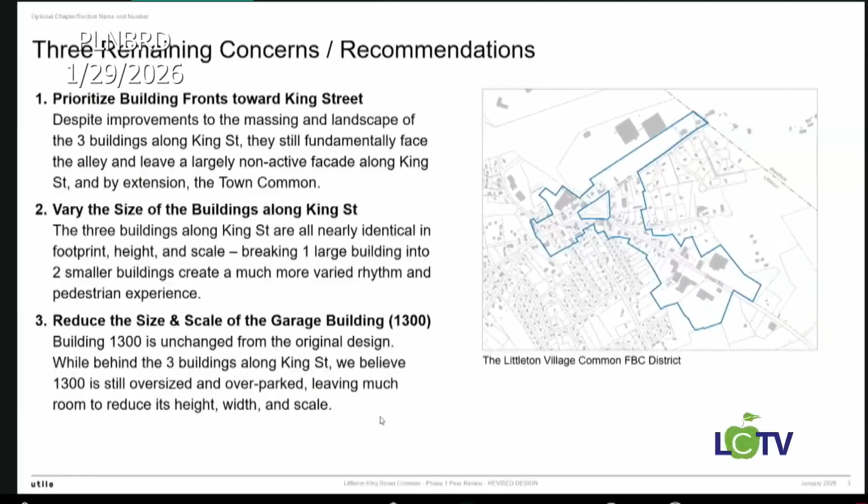Comment number 2, vary the size of buildings along King Street - I'll get to that in a second. And number 3, we think there's still some opportunity to reduce the size and scale of the garage building, 1300. It's not changed from the original design. Even a reduction in height of say 6 feet or so. We've given design recommendations on doing that. Why face the street? I'm sorry, I'm not gonna get into all the bullet points here.

We can imagine why it's important to face the street. Many of the town commons and village centers around Littleton, like Ayer, West Acton, Concord, work because there's a shared understanding that buildings face the street - they beautify and activate the most public of all spaces in the town common, which is the street. They are privately owned public spaces, alleys, etc. But nothing's more public than the actual public street and the primary civic space - the common park, King Street, Great Road, etc. So we think it would be a missed opportunity if this project doesn't reinforce that and continue to activate and beautify the truly public realm of the common.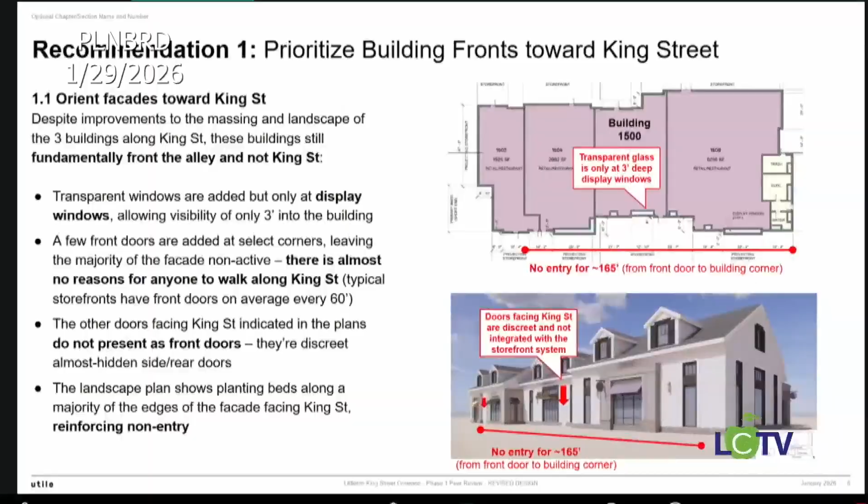There are a couple of doors that do open out to King Street, but they're discreet. Like right here, there's a door that's kind of hidden. Right there, there's one. They're not integrated with the storefront system, and we would really like it to appear like an inviting front door, integrated with the storefront system. And then again, without a front entry for the majority of that 165 feet, there's really no reason for anyone to walk along King Street, right?

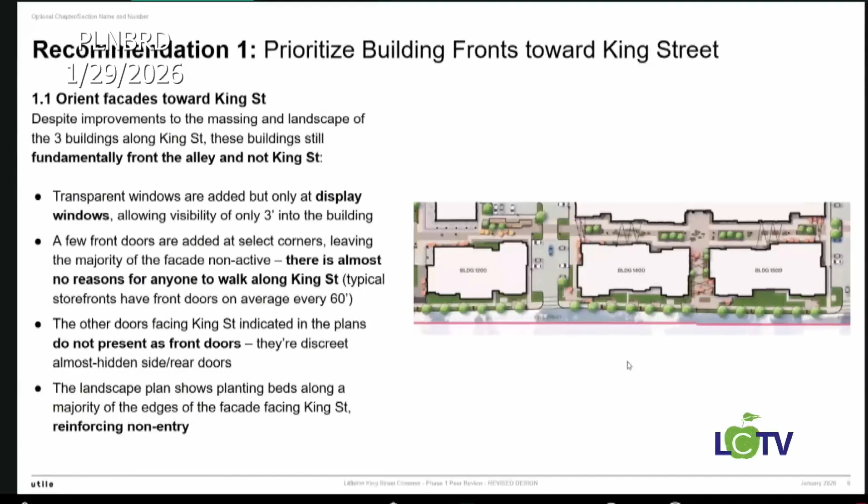Again, I want to give credit to the landscape architects - a lot of thought into placing benches, providing more pedestrian amenities, bike racks, etc. But it's a little bit, what is it, missing the tree for the forest, where they're still fundamentally not facing the front because you don't go into a building crossing a lawn, right? And it is true, as the team had brought up, that King Street can be loud and busy, and I think Mark, you mentioned you wouldn't want to sit with your partner facing King Street because of that.

There are a couple of comments to address that. One, King Street can be different in the future. Part of this project, I hope, is meant to transform King Street - to domesticate it, calm traffic. One of the ways we're doing that is narrowing the lanes, adding bike lanes. Another is adding on-street parking. I really do hope that the town pursues that avenue - it is truly a game changer urbanistically. It's not an understatement to say that all of the active main streets we know and love around Littleton, Massachusetts, often have on-street parking, not just because they provide access from the car to the store, but because they calm traffic. You see life, there's foot traffic, there's people going - what's called eyes on the street.

They create a safer environment because there are people in public. The other thing we recommend—one of the concerns the project team has is that King Street is very busy and loud.

We would recommend setting back the buildings more, which you can do. The red shows the current distance from the front face of the closest pinch point to the curb right now—this would look different if there was on-street parking. But you can set it back more, have more of a buffer, more plantings that help create a more nestled eating and dining area where everyone would feel comfortable eating, facing a much quieter King Street.

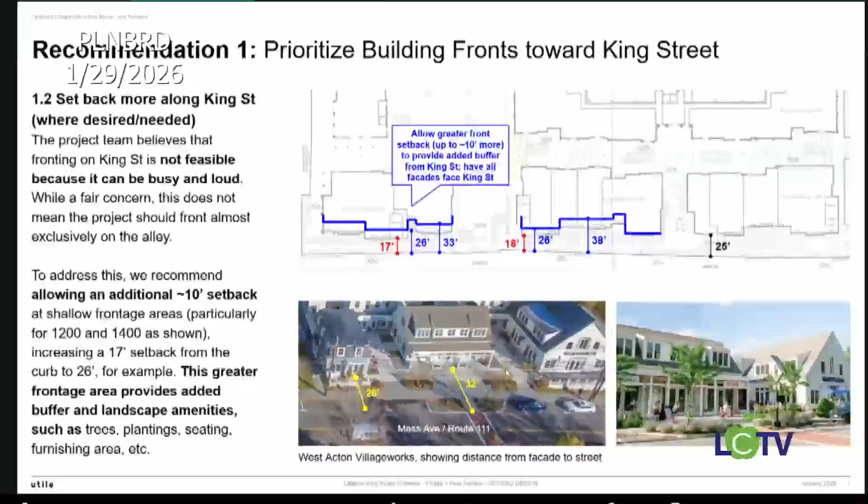This project at the bottom, which I've alluded to before, is a good reference for the distance that feels comfortable. I really encourage everyone to visit it—it's 10 minutes south of the Common. Just walking there, it really feels like a much calmer space along Route 111, with pocket parks not dissimilar to the pocket parks being proposed for this project.

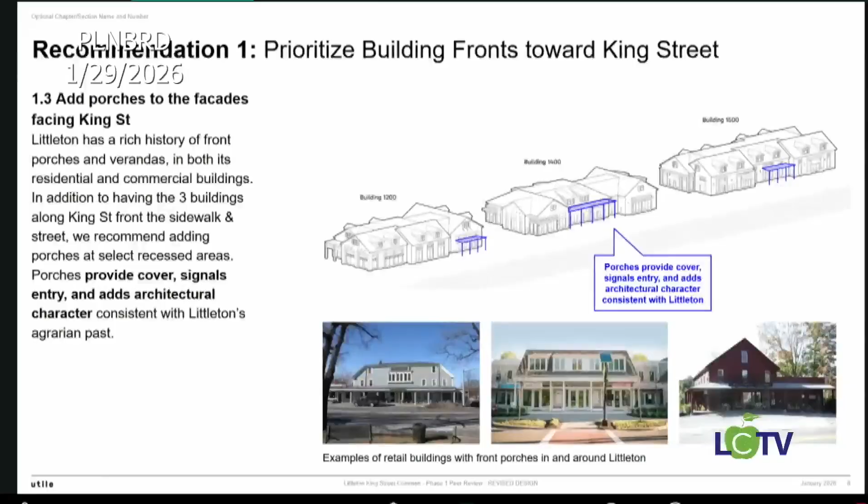Two other quick comments. This may seem small, but it was actually brought up earlier by a few on the board—I think porches are really important. They're historic to many buildings, both residential and commercial, in Littleton. They signal entry, provide cover from the elements, and are an architectural feature innate to farmhouses. We think there are opportunities to add some porches, particularly in the recessed areas in the front.

Again, reinforcing this as the front. And lastly, we recommend putting the front along King Street, but that's not necessarily to the detriment of this really interesting alley space, this pedestrian way the proponents have been thinking about. If you do put the front along King Street, this alley could take on a slightly different identity that could still be enriching to the whole project.

You can have your active green on the left, the big public plaza space that should be there—that's awesome. Then the central space could be more of a linear park that's also a service alley. If someone needs to put fire trucks through this, it takes on more of a service-oriented road, but you can still have residents come out, walk their dogs, read. You can have visitors, there could still be a few moments, and there could be double-sided restaurants that open out there.

We agree that dual-sided retail is very challenging—we're not saying you have to have it everywhere. We're saying put the front on King Street, and then there could be a few back doors and secondary entrances along that alley.

There are other examples this interesting alley could take on. Another is residential use that could have ground floor units, even increasing residential units, with little yards and stoops, creating much more of a residential character that complements the more active front along King Street. We really believe there are ways of—what is it called—having our cake and eating it too.

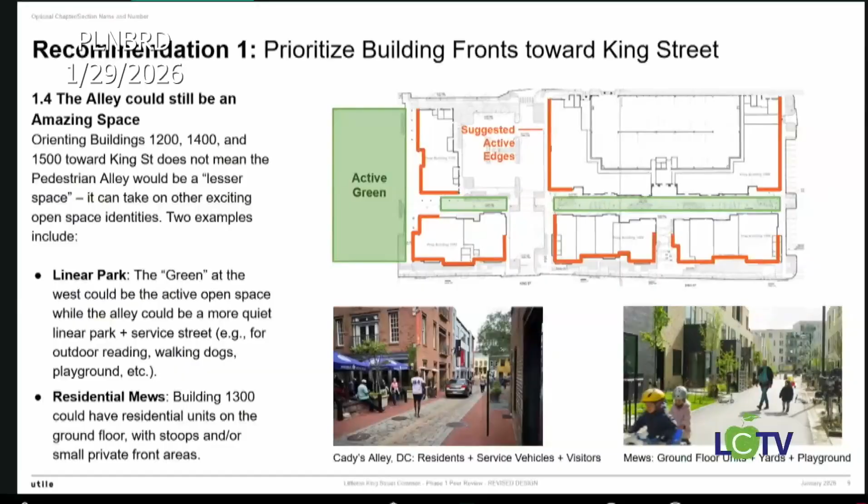Two more slides. We think the three buildings along King are all very similar in footprint, scale, and height. Even if one of them just broke into two, it would dramatically change the cadence—you'd go from large, large, large to large, medium, small, large. I know that's easier said than done.

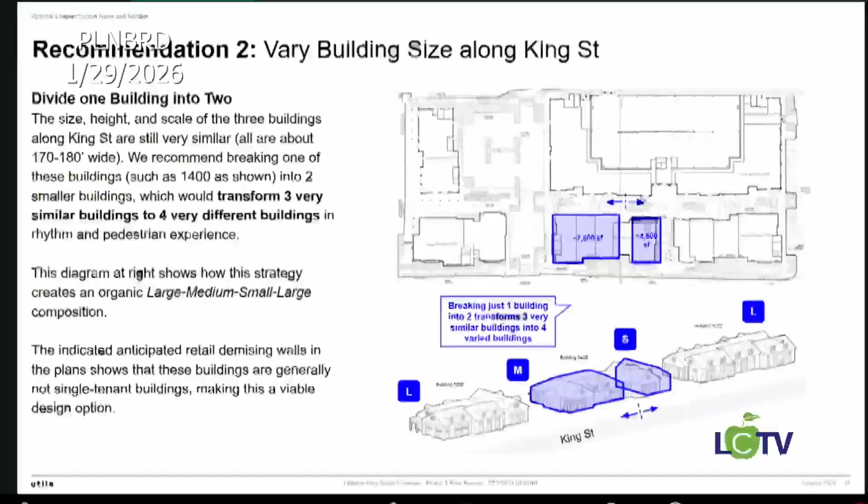For retail, we recognize some of it expands in size, but there's probably a moment where you could have 4,500 square feet of retail, with the rest still being these very flexible, large retail boxes. When Maren came to us asking for design review, she essentially asked how we'd turn a good project into a great project—this is a fairly simple example of that.

Finally, we don't have to keep litigating 1300, but we do think it's important—is there some way to bring down the height just a little bit? It's carrying excess parking from future phases, some of which will move back to those phases. As the proponents said, it's largely invisible from King Street, which helps, but it's still visible from the gaps between buildings, and it's a very bulky building that's pretty close to King Street.

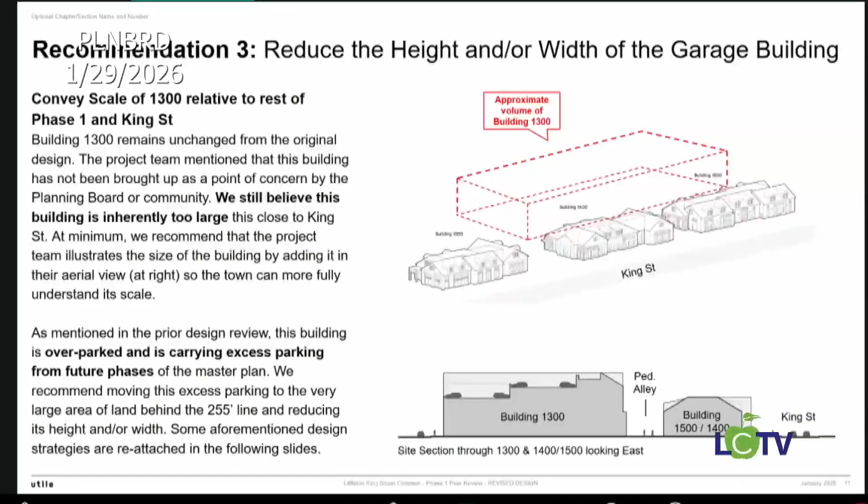Is there anything that could be done? I appended behind this—I'm not going to go into the same set of comments we had last time, suggestions for bringing down the size, scale, and perceived scale of the building. So that's it, I think.